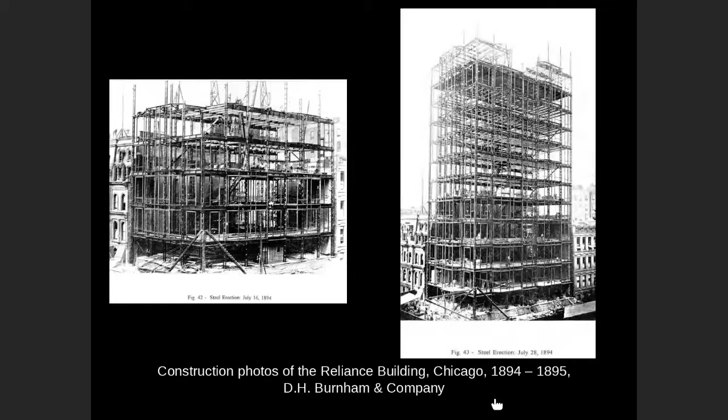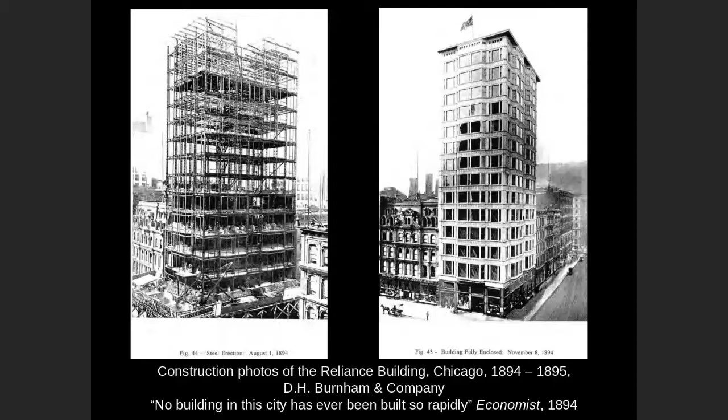But even the Economist newspaper in 1894 said no building in the city has ever been built so rapidly. It really blew people's minds how fast this could be built. And developers loved that. Time is money when you're a developer. You're paying taxes and money on the lot. The faster you can get tenants in the building, the faster you're getting income. And so they want to see rapid construction. They love this.

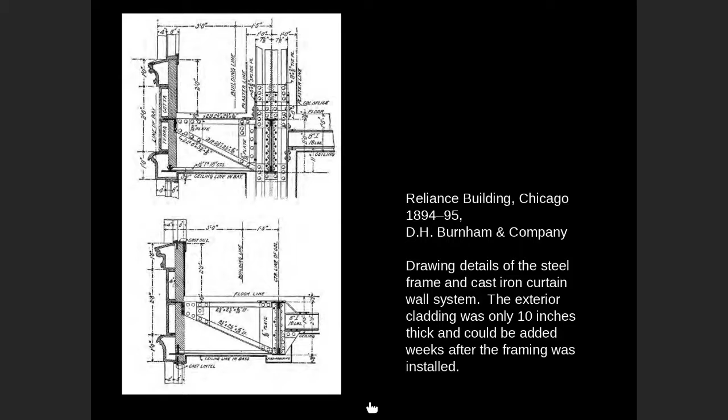And then on the left side, you can see that's the terracotta, and you can see it's only 10 inches thick, which by today's curtain wall standards is pretty thick, but 10 inches is less than a foot. That's still pretty thin, and that includes a solid masonry backup where you could put the plaster on the wall and so forth. So it really was a massive innovation in architecture and construction.

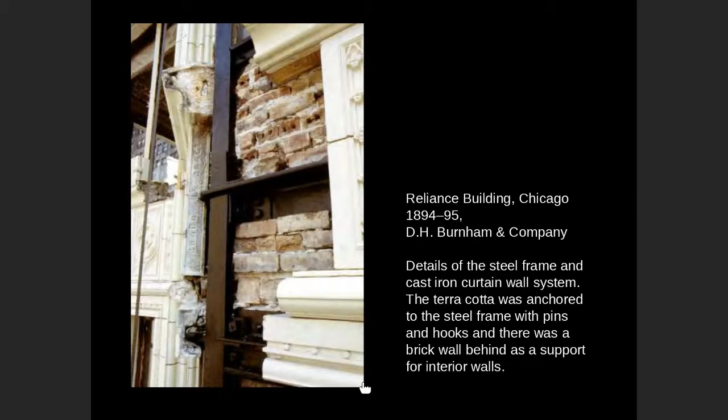And it's hung. And that's part of the problem, is that over time, if that steel rusts and corrodes, it will break apart the terracotta, and the terracotta can fall off if you don't keep it repaired. And so it does take a lot of repairs and renovations that you see here in order to maintain these buildings 50 years later, 100 years later, or whatever.

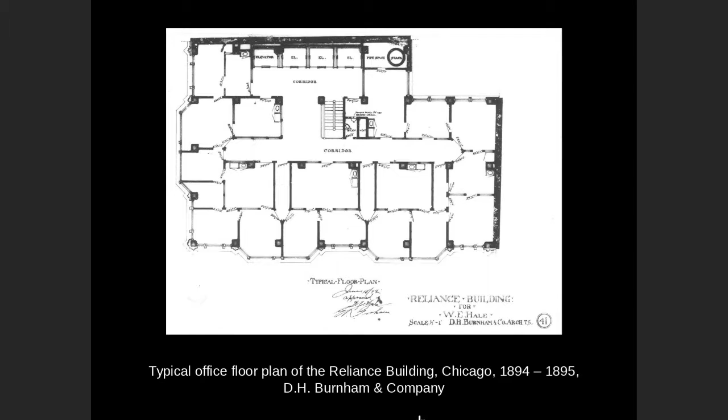And there was even a light court here in the upper right, a little window well where these offices back here could get some light and some ventilation. But most of the offices are around the perimeter. And even the interior offices usually had sort of shared windows and lights. And there's even windows that were on the office corridor so that light could filter down into the heart of the building.

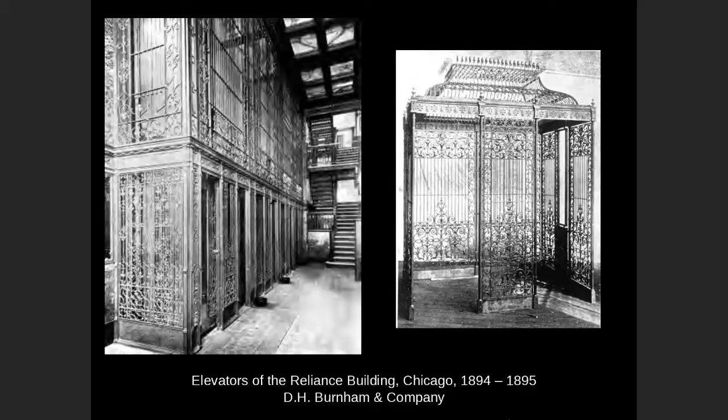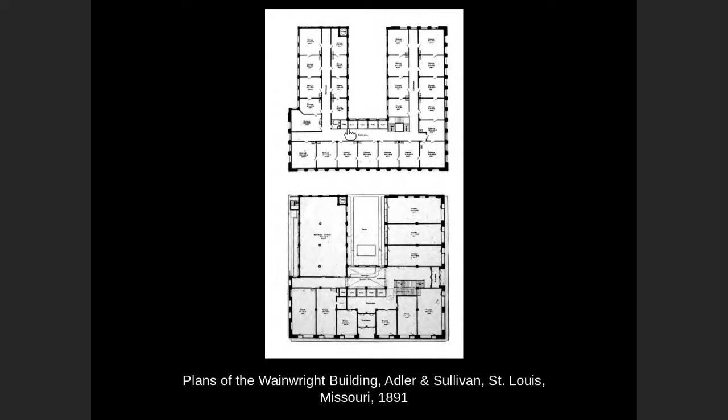Here's a floor plan, and in the floor plan we can see the same concept we talked about, the idea that all the offices have light and ventilation because they need to open windows, they need natural light to come in because they don't have good electricity yet. And so it's a U-shaped building with the elevators at the central part to create kind of a core.

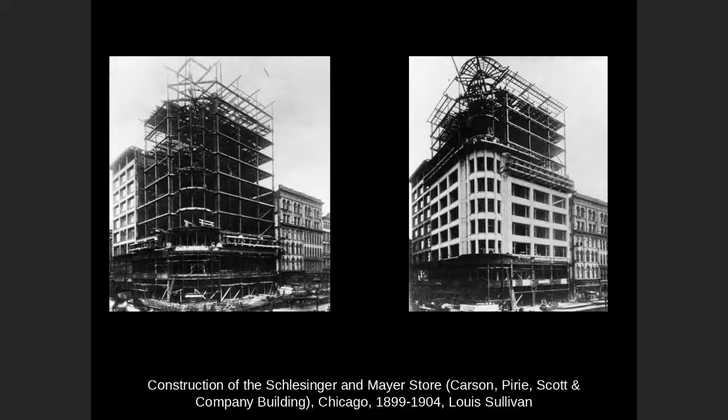Later, we're going to see in the 20th century, in the second Chicago school, that you can fireproof in other ways, and we can express the steel structure completely, and Mies van der Rohe would start to do that. But here we're still in a technology where we're using masonry to do that.

And a lot of architects in the East said, these are ugly buildings. These are ordinary. They're plain. There's no style to them. You know, those Chicago architects, they're not making architecture. They're just making factories. So this was not widely embraced by everybody in the country,

but it was really popular in Chicago, and a lot of developers increasingly said, hey, I don't want to pay for all that fancy design and architecture. Just give me a building that I can put into use and I can start charging rent to right away. And as the 20th century went on, developers, who are the ones paying for these buildings, said, I just want these Chicago-like buildings, because it's cheap and it's easy, and that's what I want.

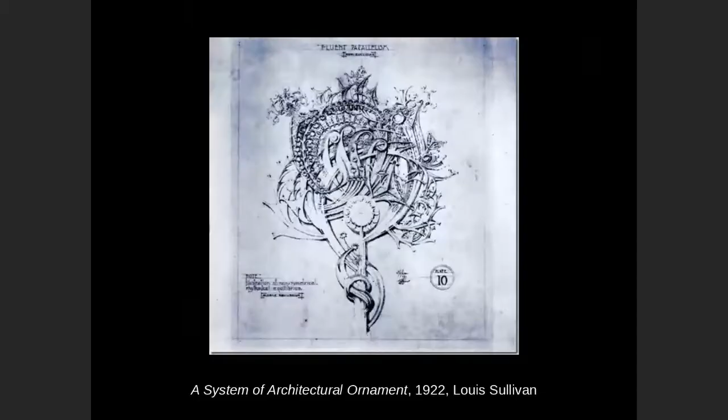This is very much Art Nouveau architecture. We'll talk about the Art Nouveau in a couple of weeks. But the Art Nouveau really originates in Chicago. There's good scholarship now to suggest that the Art Nouveau movement, which was most common in Europe, really originated in Chicago by Sullivan at some of these buildings and was adapted and adopted by European architects. So one of the first instances of, instead of Americans borrowing from Europe, Europeans borrowing from Americans and especially Chicagoans.

And these are just a couple of things. Sullivan in 1922 wrote another book, A System of Architectural Ornament, that talks about this inspiration from nature and how ornament ought to be inspired by nature, not by Greek revival and so forth. It wasn't very influential by this time. Other architecture was eclipsing it, and Sullivan had, unfortunately, sort of fallen out of favor and died in the 1920s, sort of penniless.

Carson Pirie Scott, just a little quick aside: Schlesinger and Mayer built the store. They were a big department store in Chicago. It pretty much bankrupted them building this department store, ironically. And so soon after the building was complete, they went out of business.

And Carson Pirie Scott, who had been in the Reliance building just a block down the street, they were expanding, and they said, "Hey, we'll take over." So they took over the building very early on in about 1905, and were there until the early 2000s.